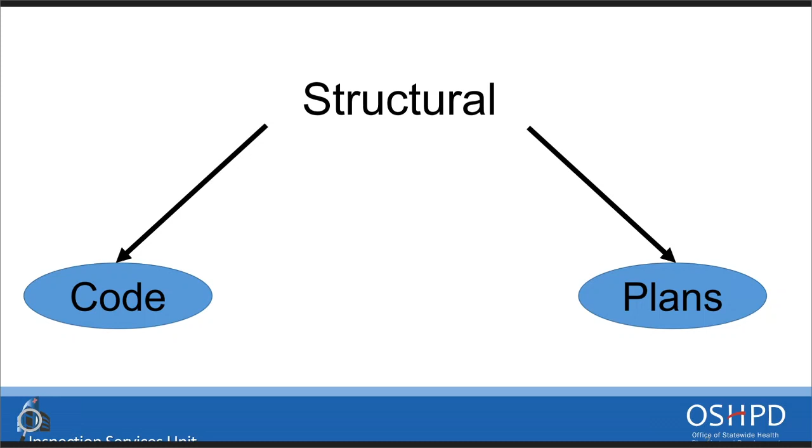The code is divided into class A, which will have 20 questions; class B, 12 questions, which cover anchorage and bracing; and class C will be 20 questions if applicable to that specific class, with anchorage and bracing. Keep in mind that structural part 1 and part 2 embrace everybody, class A and class B, in order to read the plans. So don't be afraid if you are class B and see some questions mostly for primary structural—the criteria is basically the same, meant to guide you on how to read the questions, make the right interpretation, go through the plans, and answer.

Next slide, please. So for the plans, the questions for the exam will have class A with 28 questions, and class B with 6 questions, again for anchorage and bracing. Next slide, please.

Before going through the examples for plan reading, we want to share a few things. Why are we doing all of this? The reason for this webinar is to guide you through the right process for the exam. You probably already know how to read plans, and this is good. Or maybe you're struggling, and this is why it's nice that you're part of this webinar. We are here to guide you. We are here to help you.

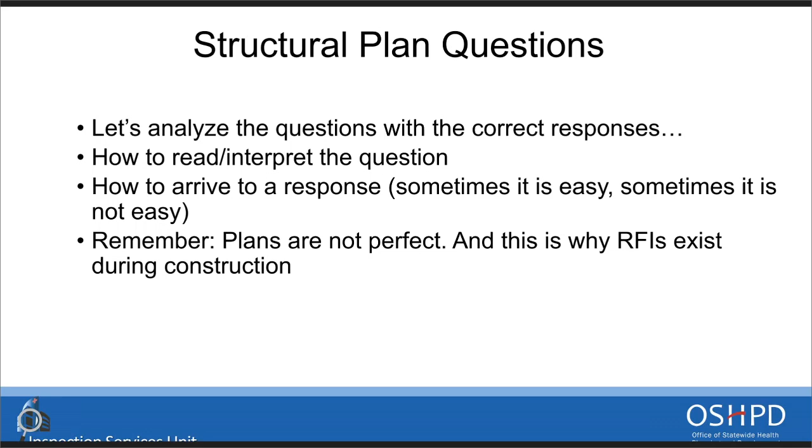What does approved construction document content include? They have the original approved set, but also RFIs, non-material alteration changes, and material alteration changes. The information can be anywhere in the drawings, but usually there are two main portions to divide in your logic for where to find information. General information of the project may appear on the drawing title sheets, while specific information will be contained in the drawing details and schedules.

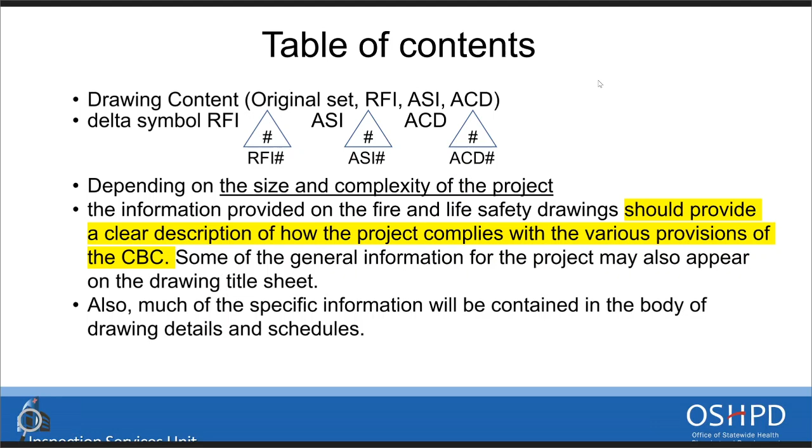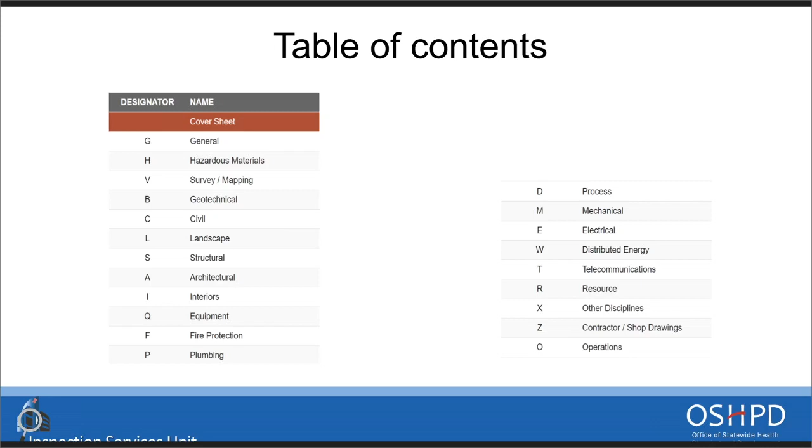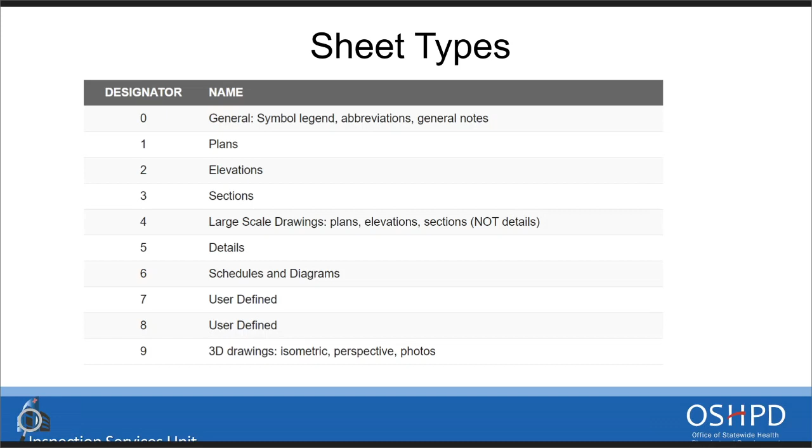Next slide, please. In this example, we are going to show you the different disciplines.

The main ones are the cover page, the general notes, and the UL assembly. Sometimes the UL assemblies are included in the specific discipline, and sometimes they are in the general drawings. So be flexible navigating through the set of drawings, because specific information is not always where you're thinking.

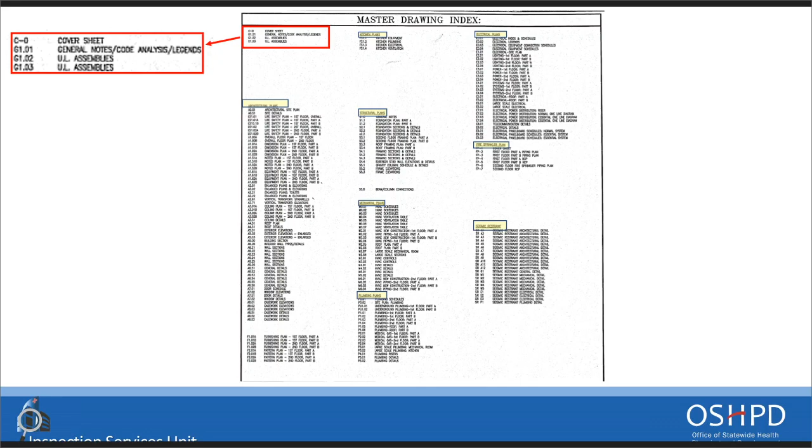Today we are going through the structural discipline. We are going to show you which disciplines are relevant to answer the plan reading questions for the structural portion. The structural relevant drawings are, of course, under structural, but can also be under the architectural discipline—kitchen plans in this case—as well as seismic restraint, which you will see on the next slide.

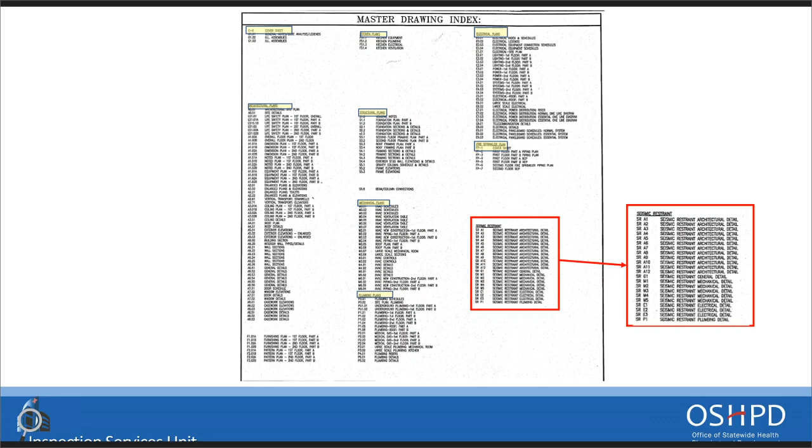Under the structural discipline, there are also framing plans, foundation plans, elevations, and details. Next slide.

Something we would like to remind you is what you need to look for in the drawings. You need to look into notes, keywords, typical details, general notes, but most importantly, you sometimes need to look at all disciplines, because to make a good project, all disciplines need to talk to each other. This means that information you might think is in the structural set of drawings may not be there—you might need to look into architectural, mechanical, electrical drawings, and so on. So be flexible.

Next slide, please. And with that, Chris, it's all yours.

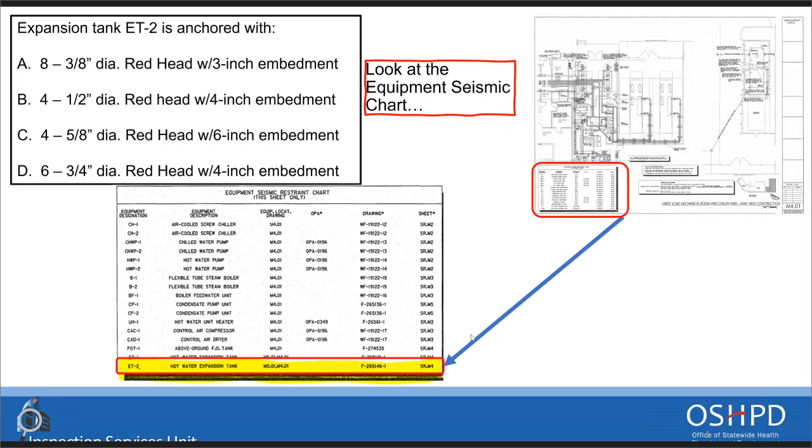So always when you're looking for equipment anchorage, it could be on either the discipline or structural, a few different locations. Looking at this seismic restraint chart, remember we're looking for expansion tank ET-2. We find ET-2, and it says equipment location for the drawing, drawing sheet, and then a sheet with a star, so SR.M4. M4.01 would show it on plan, and M0.01 might have some general notes about the expansion tank. So we'd probably want to go check out SR.M4 next.

On the upper right, you can see that we have pulled up sheet SR.M4. If we zoom into the middle, that is a detail for expansion tank ET-2. You can see the tag at the top. There's a lot of information about the weight and the size, but we also see the anchorage. It calls out 1/2-inch diameter red head, Trubolt anchors with 4-inch embedment. So if we go back to our question, we'll see that answer B aligns with that.

So are there any questions about how we got through this example? This one would apply to both Class A and Class B, since this one is an anchorage one.

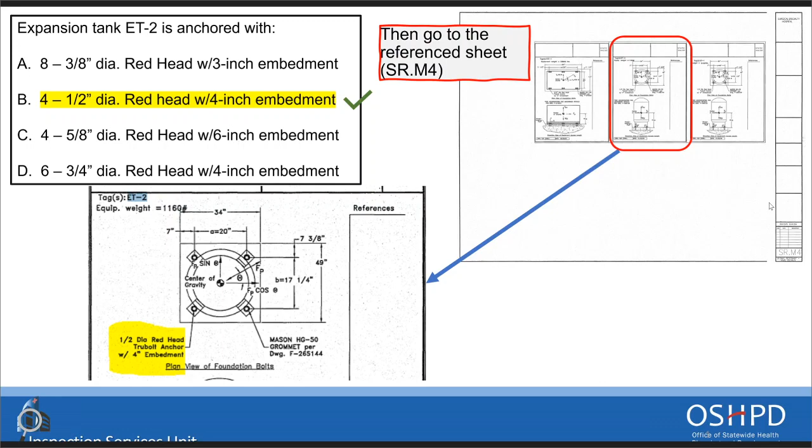Okay, thanks for all the questions, everyone. So we'll move on to example 2 now. Okay.

So example 2: how many bolts are required to attach the beam at the second floor along grid line M to the column at grid line 23? So just from reading the question, we understand that we're talking about framing plans at the second floor.

So first thing we'd probably want to do is pull up the framing plans from the structural drawing. On the right, we have the second floor framing plan pulled up. Looking back at the question, it's at grid line M and grid line 23. You can see that we've highlighted grid line M, running left to right, and grid line 23 running up and down.

Then, how many bolts to attach the beam? So we have a zoomed in section. I think the highlighted box is looking at one of the details there. Actually this should be over to the left a little bit. Sorry for the box being mislocated, but I think the answers are going to be the same because it's the same beam across the whole line.

So we've zoomed in, and you see that we have a W21 by 44 shown in this area, and you can see that along the whole line, so the answer is still going to be the same. There's also a detail called out, 2, S4.1.

We'll start with there, so we'll pull open detail 2 S4.1 just to see if it has any applicable information. Looking through it, it doesn't really talk anything about the end connections of the beam. It's more how it's framing with the deck, so it's not applicable.

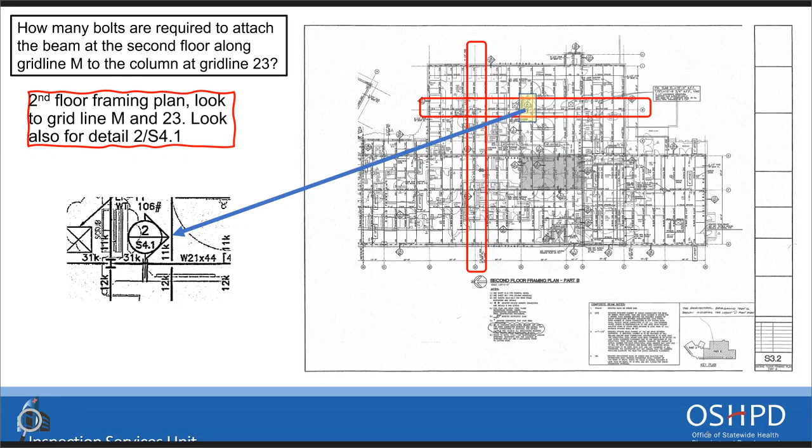Can you repeat how do you challenge the question again? I believe there's a spot on the exam to just write it in. It's a great question. On the actual Scantron, there's a place for you to identify which question you're looking to challenge, and it's something that we can look into. Like Chris said, that's something we'll take into account, and possibly if the question is unclear, or we determine we're able to throw it out, that's something we might do. So John, I don't know if that answers your question. Yeah, that helps, thank you.

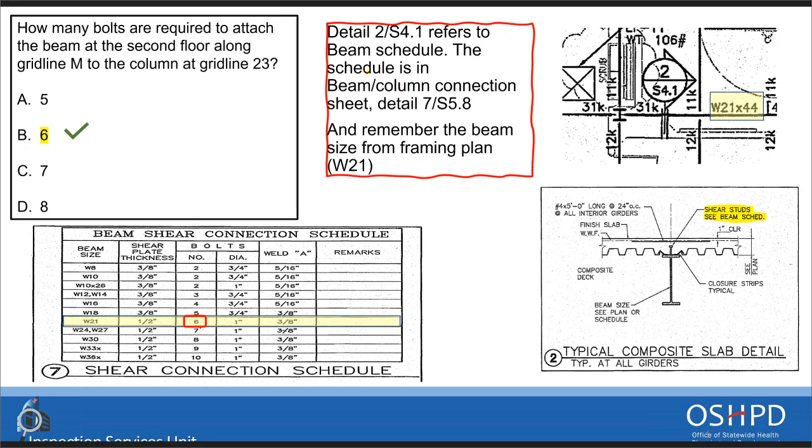All right, thanks Caesar. Okay, so we'll move on to example 3. What is the base plate size and thickness for the column at the intersection of grid lines P and 27? If you've already flipped through the plans and are familiar with the sheets, you can go straight to the column schedule sheet, S5.1. We're zooming in here, you can see we're showing P-27, and this is calling out the size of the columns. Typically on the plans, column sizes aren't shown directly, they're usually represented in a column schedule unless the building is maybe 1 story. So here we know this is the column size.

Typically, base plate size is going to be dependent on the size of the column. If you see in the upper right corner of that same sheet, there's the base plate schedule. Now that we know the column size, we can zoom in on the base plate schedule, and we know we had a W10 by 33 from the last sheet. So we can see the base plate is going to be 1 inch thick, and the length and width are going to be 18 inches. So that would be answer A for example 3. We'll open it up to questions related to the example or any general questions. This one was pretty straightforward.

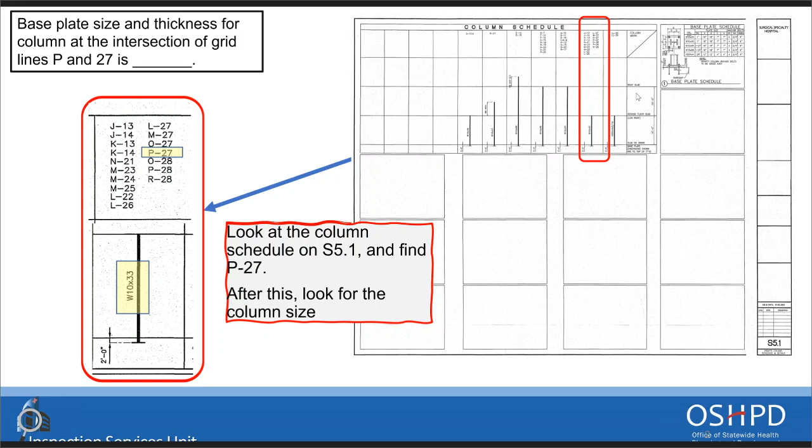Great, thank you Chris. George, I see you have your hand up, I'd like to call on you. George, I'm going to unmute you, if you can unmute yourself that'd be great. George? Yeah, I see right here it shows on S5.1, the same sheet, look for the base plate schedule to find the answer for W10 by 23. Is that a typo there? Is that supposed to be by 33? Yeah, that's a typo, it should be 10 by 33. So you can see, thank you, we got the right one highlighted. Okay, thank you.

Right, and that's a great example. If you see that on the exam and it just doesn't make sense to you, or something we call out that shouldn't be there, go ahead and challenge it. That's a great example. So George, thank you for that, and thank you for raising your hand.

I'd like to go ahead and encourage others to raise your hand as well. I see we have about 98 people on the webinar, so thank you for joining us. Go ahead and raise your hand if you'd like to have a discussion or if you have a question. And we have a question in the text box: is the webinar registered, or where can we find it?

I'd like to answer that, and point you onto our website. If you're on a computer now, you can follow the instructions I'm about to give. Go to oshpd.ca.gov, and then at the top of the page in the blue ribbon is Building Safety and Finance on the left-hand side. Click on that.

Right underneath that is Forms, Training, and Resources. Look for the section that says Webinars. When you click on that, scroll down all the way to the bottom. Look for the Inspection Services Unit, and you'll find the upcoming webinars with dates. If you click on that date, it will allow you to register for that specific webinar. We have February 25th, March 9th, all the way down to March 30th, which is instruction of IOR exams, which you can register for, and we'll see you there.

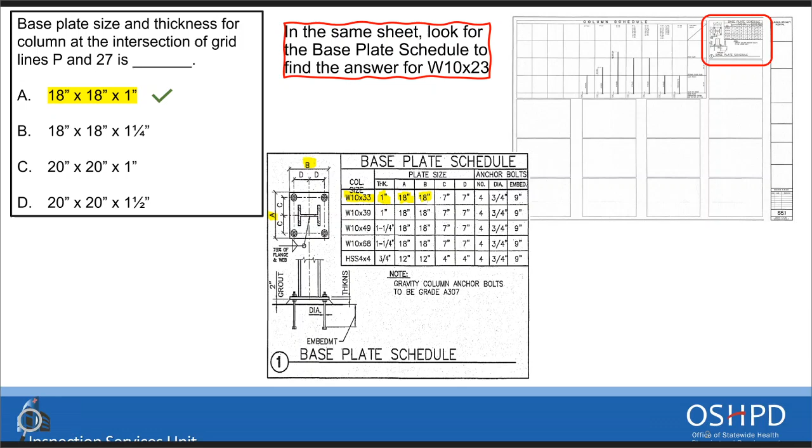Okay, so let's go to example 4. This one is: the kitchen equipment is anchored to what type of concrete? This question is very general, so I think the starting point would be to look through the kitchen layout drawings or the kitchen drawings to try to find an equipment schedule.

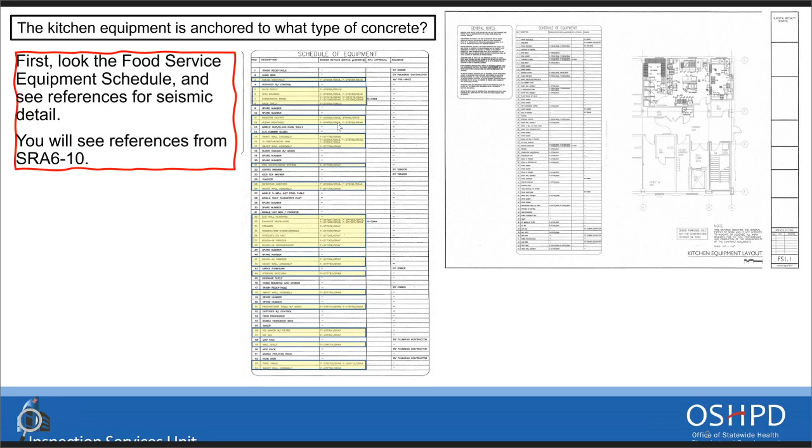So if we go to the first food service drawing, you can see we have a schedule of equipment. Looking through that, we can see there's a column for seismic details in the middle, and they're on a variety of sheets. Since this question was quite generic, we can probably just pick one sheet. For this example, we ended up choosing sheet SRA 6-10, which shows up on a few of these equipment items.

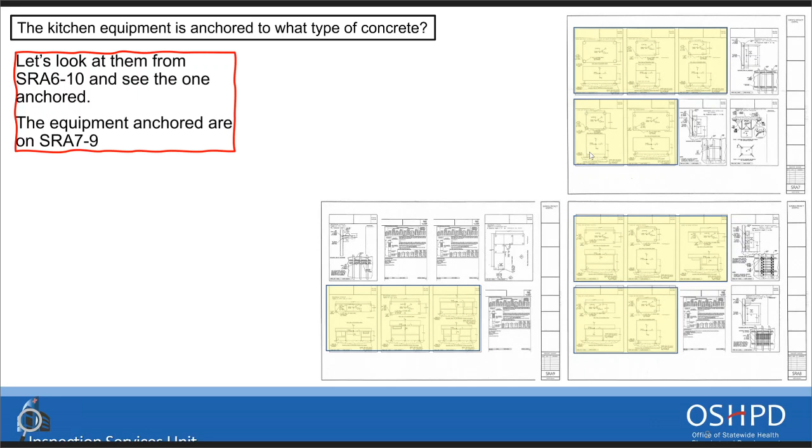So if we go to the next slide, we're showing a handful of the equipment anchorage examples, and we've highlighted some where they're being attached to the concrete. You can look through those and find the answer on any of these. We specifically looked at sheet SRA 7, detail 9. If you zoom in, the details all call out 3,000 PSI lightweight concrete.

So that would be answer B. Sometimes the food service drawings might say concrete per structural, so then you'd have to go back to the structural drawings, and knowing where the kitchen is - for example, if it's on the slab on grade - you could look in that area to see what type of concrete is there.

So you might not see it from the plans. Typically that's in the general notes, so you might have to go to the general notes of the structural drawings, where you could see they specify for slab on grade it's 3,000 PSI lightweight, or if it's an elevated slab. So there are a few different ways you could possibly get to this answer depending on how the plans are set up.

And I guess this is a good example, that this is just one set of plans. Every design professional sets up their plans differently. So when you're first on the job and get your plans, you really need to sit down and spend some time to go through things and get familiar with it, because everyone lays things out differently. And with that, we'll open it up to more questions.

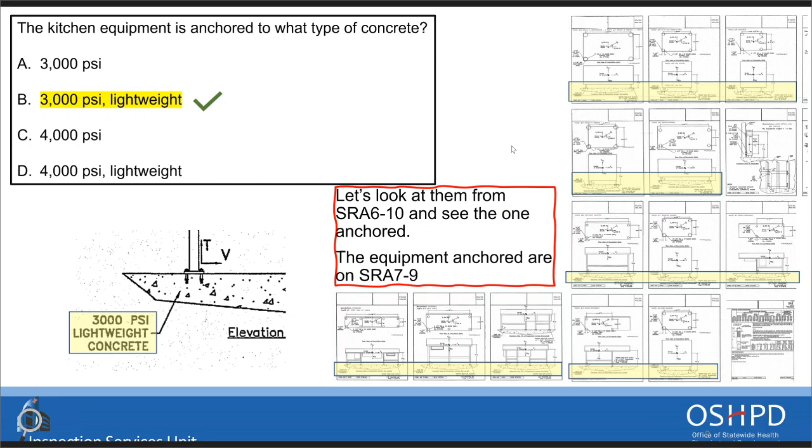Okay, I'll move on to example 5. This one says hot water recirculation pumps HWRP-1 and HWRP-2 are blank. I'm going to skip to the question first so we have a sense of what we're looking for: mounted on housekeeping slabs, mounted on pedestals, suspended from the deck, or wall mounted. That way we have a better idea of what we're supposed to find.

The question is asking about hot water recirculation pumps, so the first guess would be to go to the plumbing drawings and try to find an equipment schedule. That's what we've done in this example, and I think that's how these plans were set up. If you go to plumbing drawing P3.01, you can see they have an equipment seismic restraint chart, showing equipment for this sheet. You may need to flip through a few plumbing sheets till you find the correct plan location for these recirculation pumps. We can see HWRP-1 and HWRP-2 listed here.

It shows the equipment location and the sheet number for the seismic restraint, which is SR.P1. So we flip to SR.P1, and this shows it's on drawings WF-19122-28. We find WF-19122-28 and see that both hot water recirculating pumps reference the same sheet and the same detail. They're both supported, suspended from the deck or slab above. So that puts us at answer C.

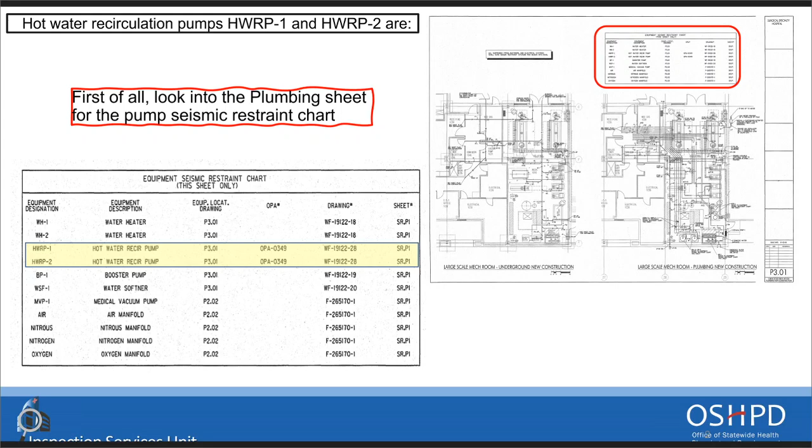Now for this project, the plumbing sheets had the equipment schedule and listed the drawings. As I mentioned earlier in another example, the structural drawings could have a list of all seismically braced or anchored plumbing items, and you could even find the detail in the structural drawings without it being in the plumbing drawings. It really just depends how the design professional sets up their drawings. So be aware that this same question on a different set of plans could have the answer in a completely different spot. Sometimes the plumbing drawings have the equipment schedule but reference a structural sheet, and the structural drawings could also have a schedule referencing that same detail. So depending on how things are set up, there could be multiple ways to get to the same answer.

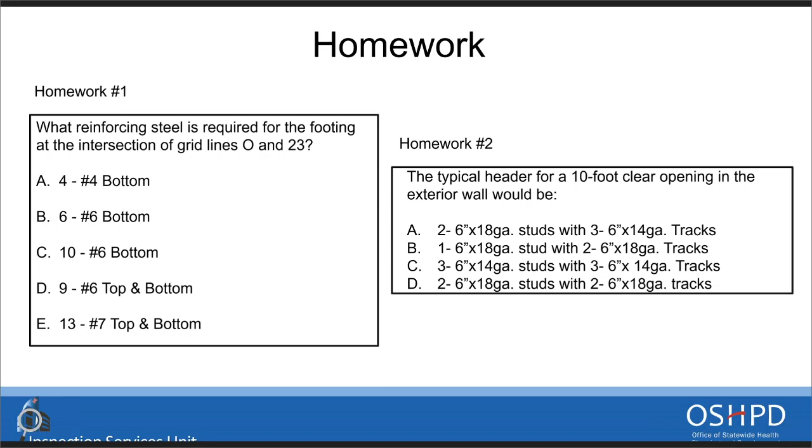Just so you know, we will be sharing the results of what everyone submits as far as percentages, to see who got the percentage right and where we need to further clarify on our end for the presentation. So Brian, thank you for raising your hand, I'm going to go ahead and mute you.

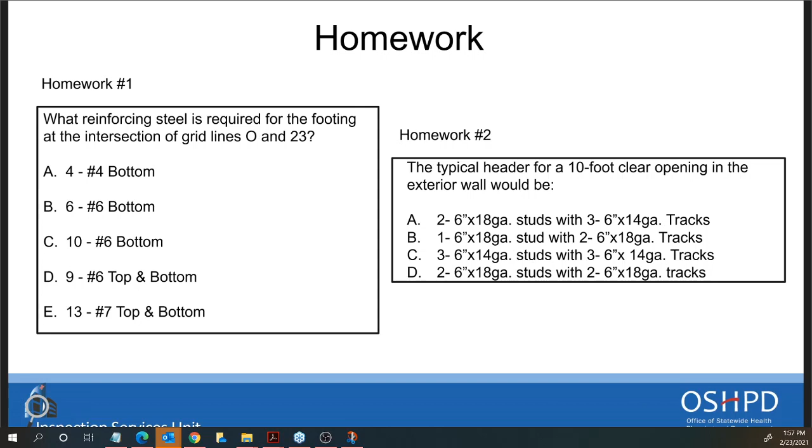I had a quick question on the page that comes after the homework. You guys were saying the email so quickly, I just wanted to screenshot that for myself. Perfect.

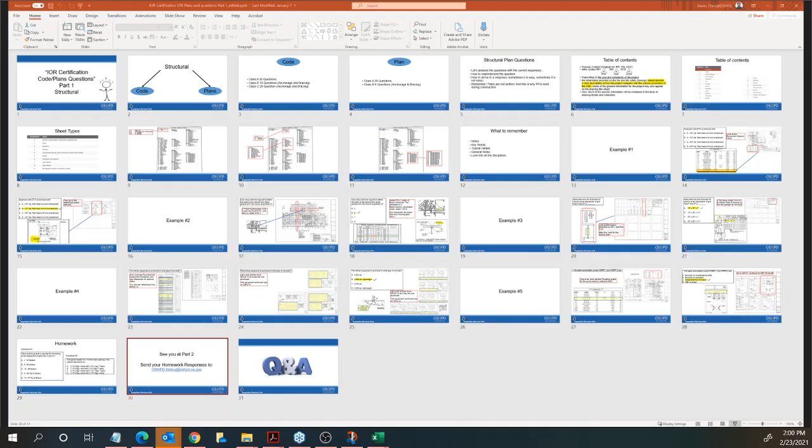What you can do is go ahead... share my monitor. Oh, it won't let me share the GoToWebinar control panel. So never mind, because you will have it as a presenter anyway. Waleed, I'd encourage you to send an email and provide a phone number, and maybe we can go over the phone with you on how to do that, or we can simply reply and provide those for you, hopefully the file isn't too big where we can email it to you. Okay, no problem, I will send you an email.

Great, thank you. If everyone can see my screen, here's a screenshot of the GoToWebinar control panel. Probably looks a little different for you because you are not a presenter. But down here, let me draw an arrow, there's something that says handouts. If you click this little down arrow, it'll expand and you'll see about 5 PDFs you can download.

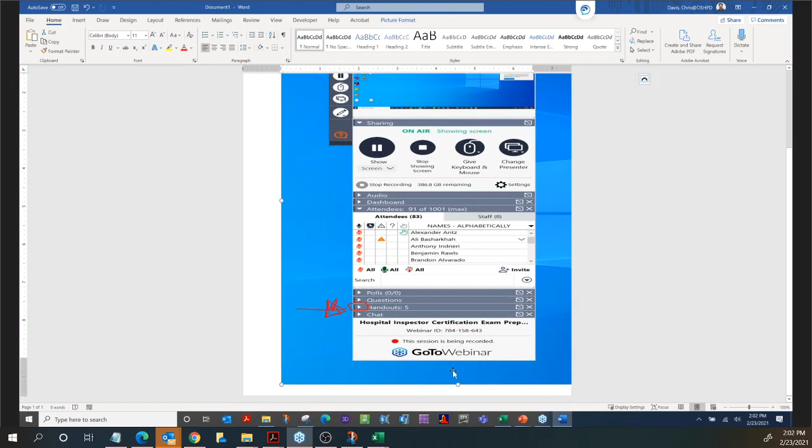Chris, is there any way you can make that a little bigger? I'm having a little trouble seeing that. Let me see, let me try one other thing. Okay, yeah, I got it, thank you so much, it's appeared here. Perfect. Oh, yeah, sorry, it's not the easiest to make bigger. Yeah, that's quite all right. I believe Waleed got that and was able to see those down there, so Waleed, thank you for your question.

Yeah, I appreciate it. And the other question now, because I'm studying the ACI code, will that be of benefit for us also for the structure part of this exam? So again, we had a similar question earlier, and the other question was asking specifically about ICC exams. Yeah, it's me, it's me. Yeah, the way we responded was that even though our exams are not based off ICC, not based off ACI, not based off NFPA, not based off anything like that.

But if that's something you choose to study on your own accord, it may help you. We're not saying it won't, but I can't definitely say that it will, based on the information we're providing and the types of questions we're putting out there for the OSHPD specific IOR exams. So we should study the OSHPD codes, I mean, for each part - plumbing, electrical, structure, architectural.

If you're looking for a list of items to study, go to our website, click Building Safety and Finance, scroll down to Hospital Inspection Services, and in the middle you'll see Hospital Inspector Certification Examination Information. Click Learn More, go all the way to the bottom past the IOR exam application, and you'll see a tab labeled View Acceptable Reference Materials for Exams. There you'll find a list of acceptable references including the California Administrative Code, California Building Code, and reference standards such as ACI, ASCE, AWS, NFPA. This should be a good study guide for you.